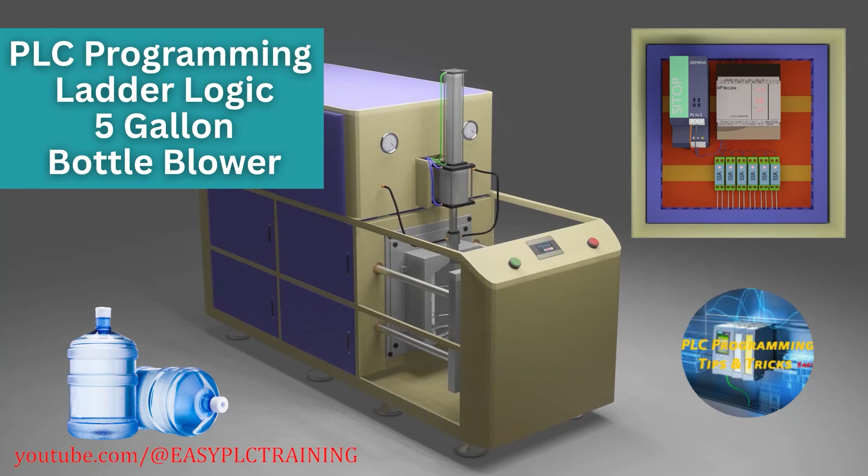Welcome. Today we will see how to program a PLC for a bottle blowing machine using timers. We will try to keep things as simple as possible so that we can have an idea how the ladder logic works. Now let's quickly see the machine, how its parts are connected and how they are working.

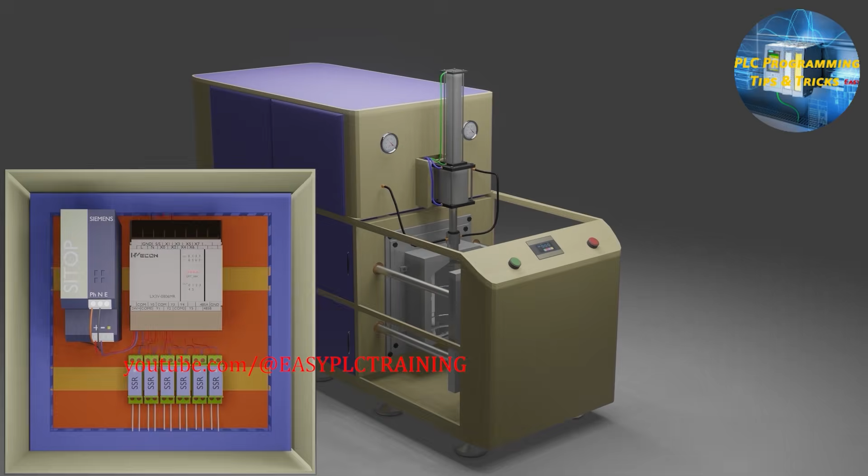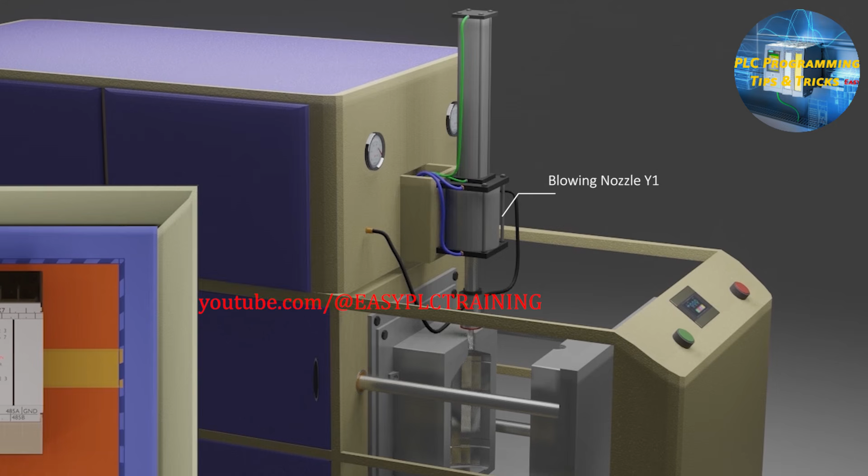We have a blowing nozzle cylinder solenoid which is connected at the Y1 output terminal. When the Y1 output is high, the blowing nozzle comes down and seals the mold. Next, we have a stretching cylinder solenoid which is connected at the PLC output Y2. So when the Y2 output goes high, the stretch rod moves down and goes into the mold.

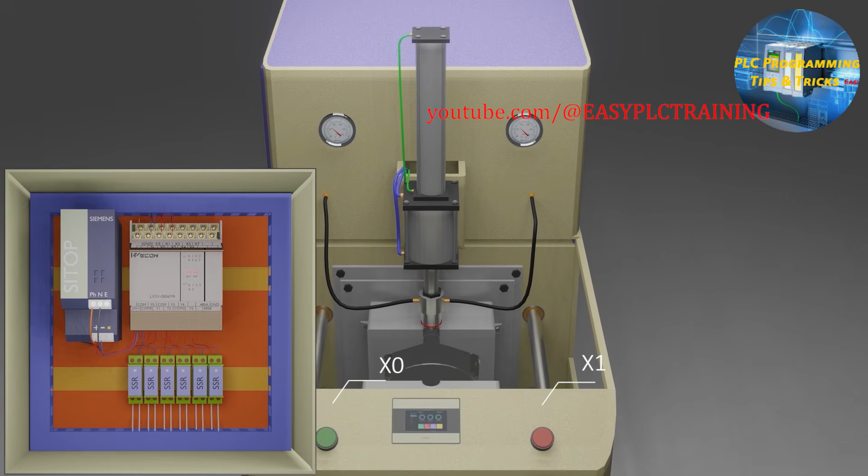Next, inside the machine, there is a mold locking cylinder. This cylinder solenoid is connected at PLC output Y0. When the Y0 output goes high, the cylinder will move and lock the moving part of the mold with the other half of the mold, which is stationary. Next, we have two push buttons, green and red, to start and stop the blowing cycle. These push buttons are connected at X0 and X1 PLC inputs.

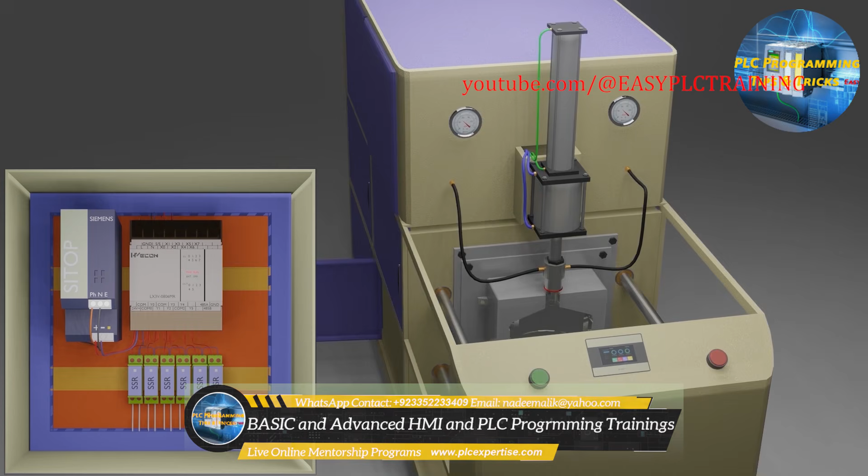Next, we have connected the pre-blow and blow valves at the PLC outputs Y3 and Y4. These valves will supply the compressed air to the preform and change its shape to a bottle. Next, we have an exhaust valve connected at the PLC output Y5. This valve is used to exhaust the compressed air inside the bottle after the blowing cycle has been completed. So let's see how the program is controlling these inputs and outputs for this blowing machine cycle.

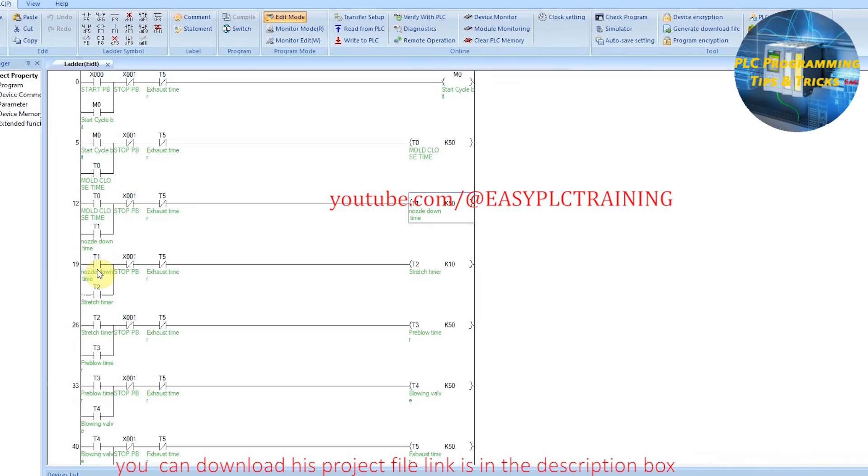In rung number 1, as we press the X0 start push button, it will hold on the bit M0, which is called the cycle start bit. The X1 push button will unlatch the M0 cycle start bit. When the cycle start bit M0 is on, it will start the T0 mold close timer. The T0 timer will start the T1 nozzle down timer. Once the nozzle down timer is over, it will start the T2 stretch timer.

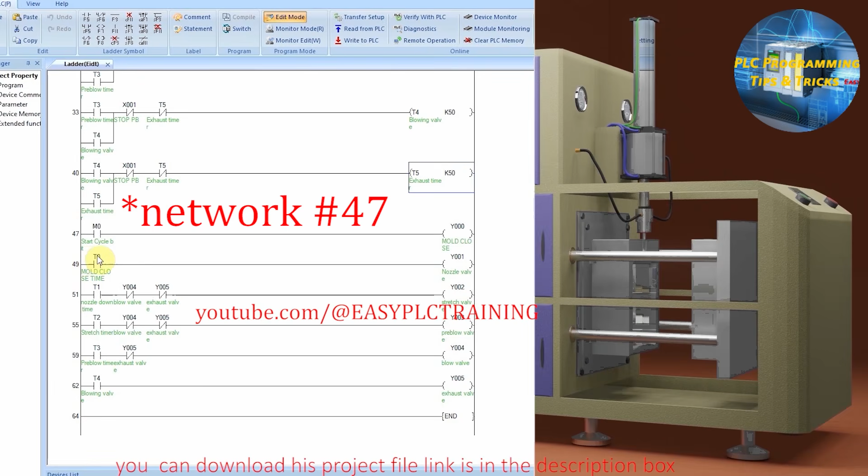In a similar way, we have assigned functions to these timers, like pre-blow, blow and exhaust timers. All of these timers will operate and activate from top to bottom. Once the exhaust timer is over, it will reset the M0 cycle start bit and the other timers as well. In network number 47, the M0 cycle start bit will turn on the Y0 mold close solenoid. This will close and lock the mold.

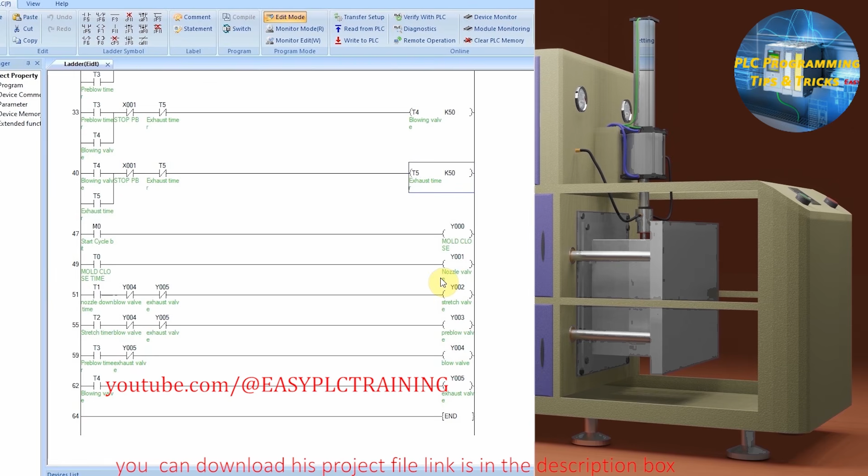In the next rung, when the mold close timer bit T0 is on, this confirms the mold is closed and it will turn on the nozzle cylinder solenoid Y1. This will bring down the blowing nozzle. In the next rung, when the T1 nozzle down timer bit is on, this confirms that the blowing nozzle is down. And this will turn on the stretching cylinder solenoid valve Y2, and the stretching cylinder will come down and go into the mold.

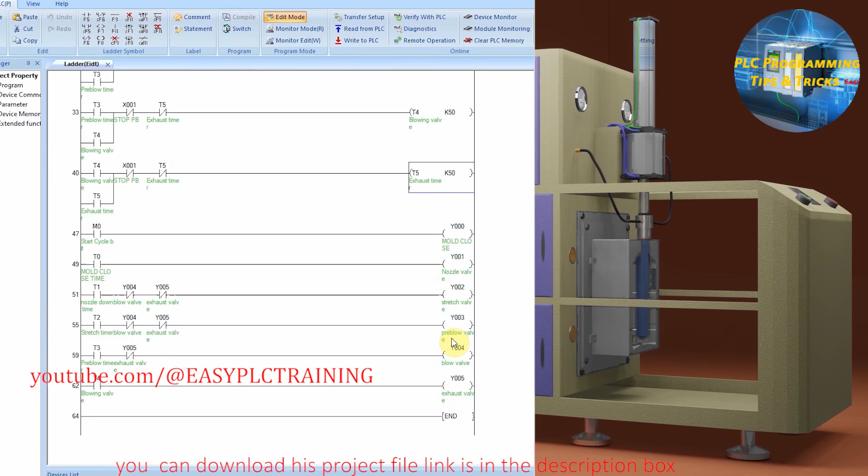In the next rung, when the stretch timer T2 bit is on, this confirms that the stretching rod has started moving, and this will turn on the pre-blow valve Y3. The pre-blow valve will supply the initial compressed air in the preform to start the blowing process. In the next rung, when the T3 pre-blow timer is on, this confirms that the pre-blow pressure has been applied. And now this will turn on the main blowing valve Y4. The main blowing valve will apply the compressed air in the preform and the preform takes the shape of the bottle.

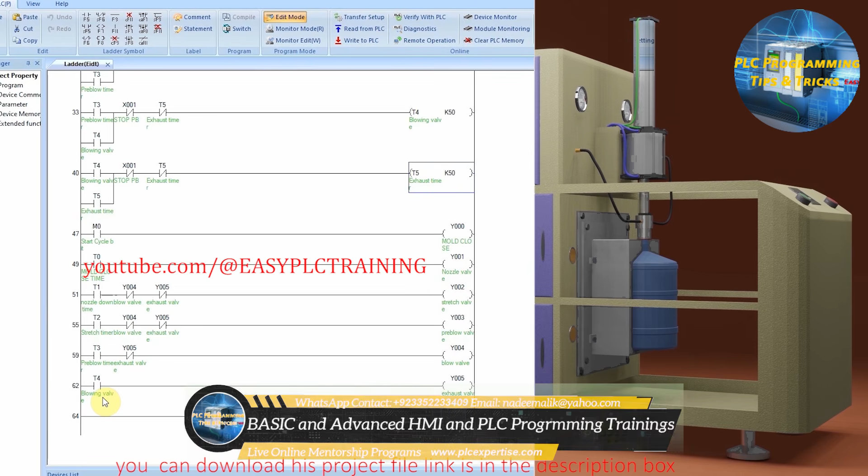Once the T4 blowing valve timer bit is on, this means that the blowing pressure is fully applied to the preform and the bottle is formed inside the mold. And this will turn on the exhaust valve Y5. The exhaust valve will exhaust the compressed air from the bottle so that the mold can be opened safely.

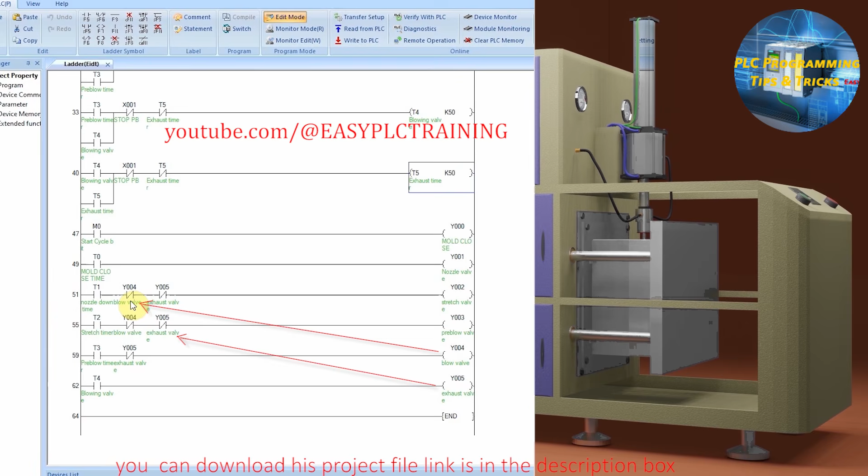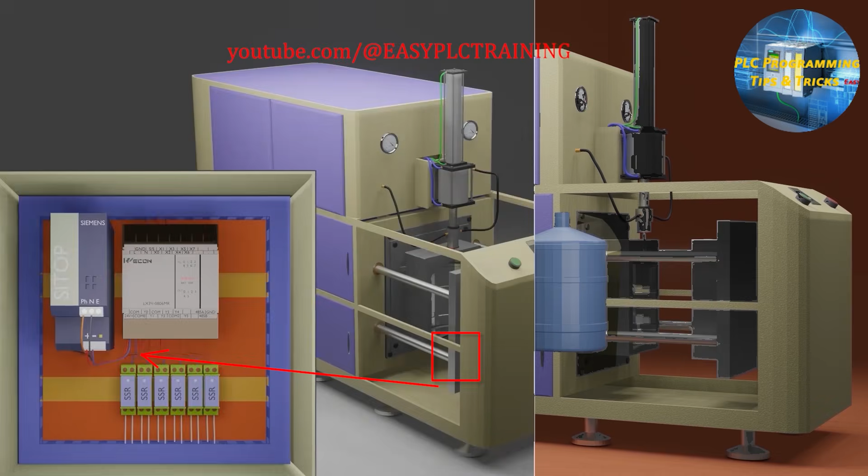You can see that we insert the normally closed contacts of the blowing valve Y4 and exhaust valve Y5 in rungs 51 and 55. This means that when the blowing valve Y4 turns on, this will turn off the pre-blow valve Y3 and stretching cylinder Y2. Next, we insert the normally closed contact of the exhaust valve Y5 in rung 59. This means that when the exhaust valve Y5 turns on, this will turn off the blowing valve Y4. Now let's upload this program in the PLC and see how it works.

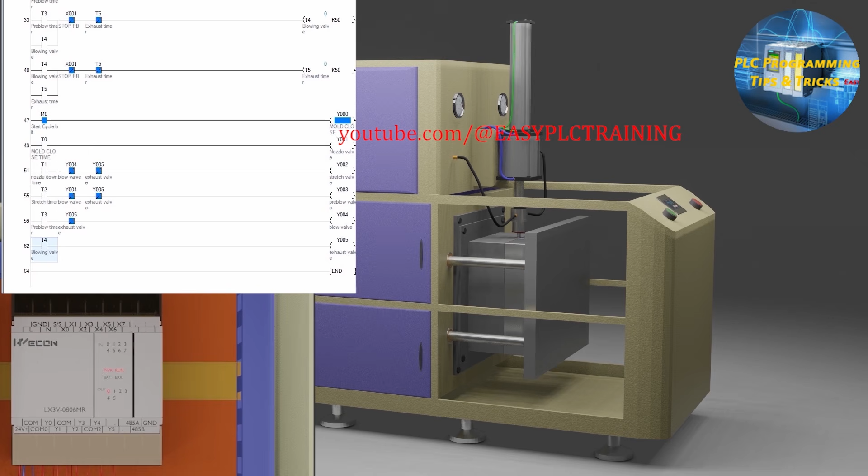The blowing machine is now ready for the test. Let's put a heated preform in the machine. As we press the green push button, it will latch on the blowing cycle bit M0, and the PLC output Y0 mold close turns on and the mold starts to close. As soon as the mold closes, the timer T0 is over. This will turn on the blowing nozzle cylinder Y1, and the blowing nozzle comes down and seals the mold.

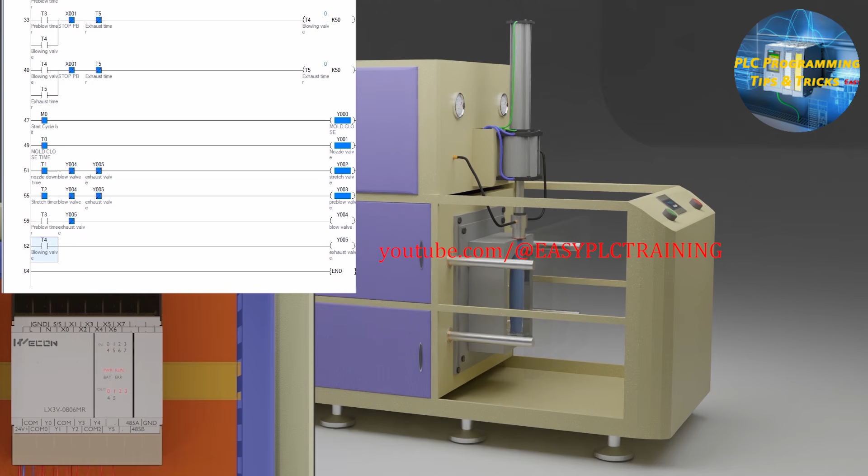Now as soon as the nozzle down timer T1 is over, it will turn on the stretch rod cylinder, and the stretch rod moves down and stretches the preform. In the next step, the pre-blow valve Y3 turns on and applies the initial pre-blow pressure, and the preform starts to take the shape of the bottle. Next step, the main blowing valve Y4 opens after the pre-blow timer is over. It will apply the full blowing compressed air pressure and the preform takes the full shape of the bottle.

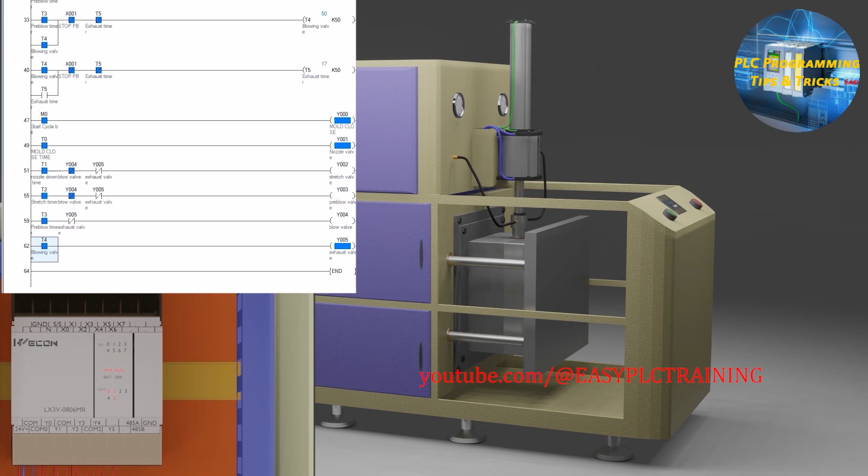Now as the blowing timer T4 is over, it will turn on the exhaust valve Y5. It will exhaust the air pressure inside the mold so that we can open the mold safely. When the exhaust duration timer T5 is over, it will reset the blowing cycle and all outputs of the PLC go off. The nozzle cylinder moves up, the mold opens and the machine is now ready for the next cycle. So this is how the basic program for the blowing machine works.